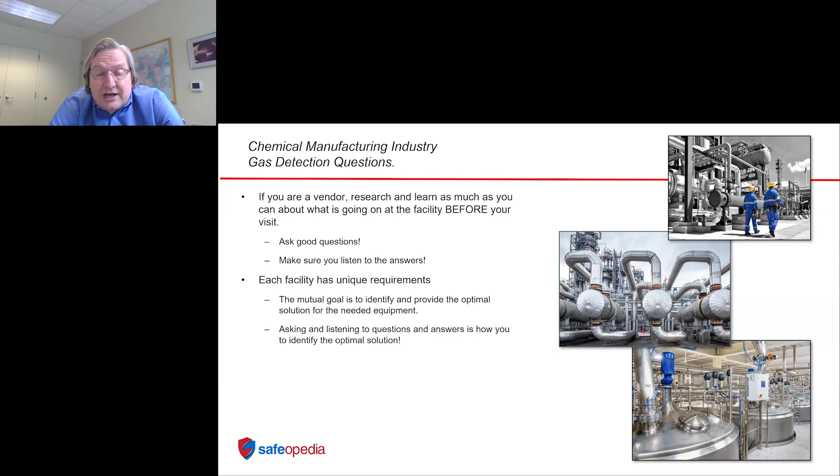So the good conversations involve sharing and asking questions and listening to the answers on both sides of the discussion. You can't have a one-sided conversation. So as an end user customer, it's also important that you look inwards a little bit. You need to have a detailed grasp of the gas detection activities and risks that are going on and exist at your site with your business.

The better the understanding that you have, the better the solution you're going to come away with if you make changes or buy new equipment in the future. And sometimes, I know this for myself, if you find yourself in a corner office, it can be an isolating experience. It sets up barriers between you and the people who actually work for a living.

So leave your office, talk to your employees, whether you're a mid-level manager or an upper management executive. Make sure that your communication and your questions flow up and down the chain of command. The more detailed grasp you have, the better. Drill down to make sure that you understand what is most important, not only to you, but to the people who are using gas detection equipment on site.

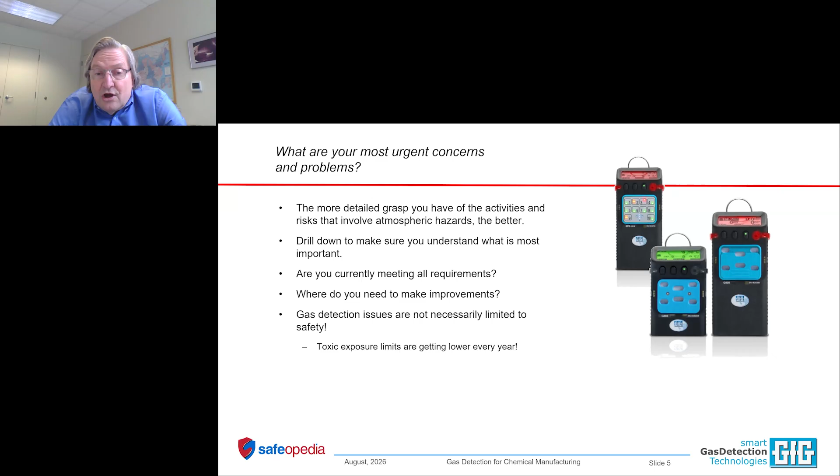You have personal exposure, industrial hygiene, emergency response. The list goes on, and we'll talk about a lot of those categories in the next few slides. Here's a starting list. A lot of times, vendors will focus almost completely on confined space, and boy, oh boy, do you find a lot of confined spaces and confined space entry programs at a chemical plant or in the chemical industry. It's definitely a major and important way that instruments are used, but that's not the only category of use.

Personal exposure monitoring: you may need to document that your workers on site are not being subjected to even momentary exceedances of permissible exposure limits for, say, H2S. Every person on site might be required to have an H2S meter for personal monitoring and exposure documentation. You might have a program that requires you to download the logged information on a regular basis, to use that information to prepare a report that goes off to OSHA or your state Safety and Health Administration office.

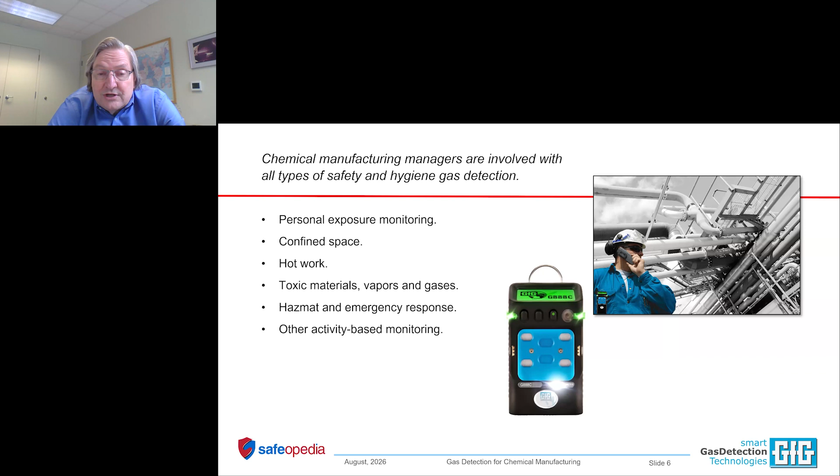In the chemical industry, almost by definition, you're dealing with or manufacturing or using or producing toxic materials, gases, and vapors. So a lot of times in the chemical industry, you're focused on a specific chemical that you need to measure or monitor or control. You have hazmat and emergency response. You have all sorts of other activity-based monitoring. In other words, there are a bunch of different gas detection objectives and requirements at a chemical manufacturing plant.

The manufacturing gas detection requirements can include production monitoring, process monitoring, facilities monitoring. Nobody wants to lose a $150 million complex or a $1 billion chemical plant in some cases. Sometimes it's industrial hygiene, sometimes it's community, such as a fence line or nuisance odor monitoring system. Sometimes the requirements are driven by EPA requirements, disaster response, and of course, construction.

At a good sized facility, there's always at least a little bit of construction going on. And during major renovations or updates or shutdowns, there can be a lot of construction going on, which leads to additional unique hazards and considerations, such as confined space entries that go on for a couple of weeks instead of a couple of hours.

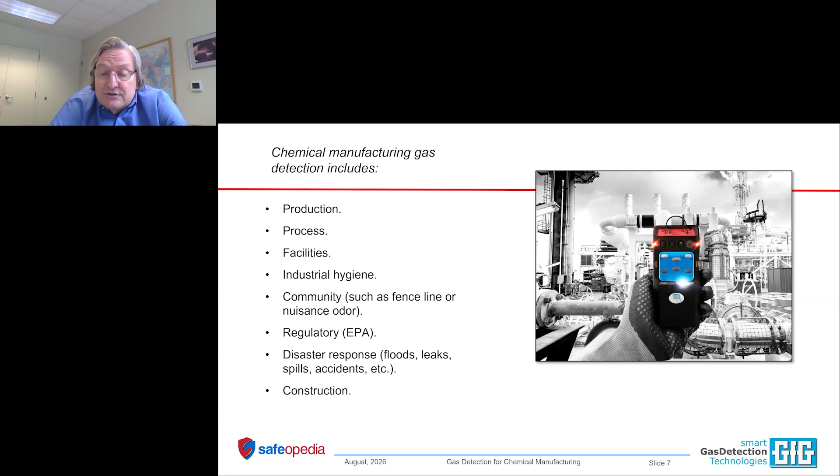Organizationally, it makes quite a bit of difference. And communication gets much more important. It's always important, but boy, when you have different contractors present doing different jobs at different points in the construction process, that introduces some pretty significant challenges.

So a lot of different missions, a lot of different activities, many of which are dependent on the use of gas detection equipment. For confined space, you have routine entries, large scale ongoing entries, entries into inerted vessels. What is an inerted vessel? Well, to reduce the chances for an explosion occurring, you might want to flood a confined space with nitrogen. So you replace any oxygen that was in the confined space atmosphere with nitrogen and reduce the chances for an explosion occurring because there's no oxygen, one of the necessary components for combustion or a combustion explosion to occur.

Hot work, other specialist procedures like catalyst rebuilding. Catalyst rebuilding is often done under a purge of nitrogen. And if you're a worker who is inside a catalyst tower, rebuilding and repacking the catalyst under a nitrogen purge, that's an intimidating situation, but it's done every day by experts. Not only do you have an issue with the respiratory protection that's required, which is pressure demand airline respirator with an escape cylinder.

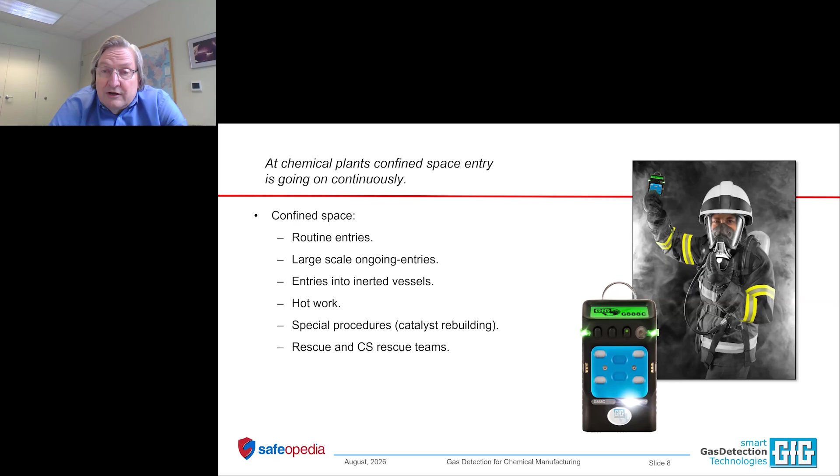And if you're a rescue or confined space response team, holy smoke, you could get drug into any of these types of confined spaces during rescue activities, and you better not do it in a dangerous way. 2 out of 3 of the people who are killed in confined space accidents are would-be rescuers. So you're twice as likely to be killed in an event in a confined space as a rescuer as you are if you were the original worker getting into trouble.

What are the most common chemical hazards, gas hazards that you run into at a chemical manufacturing plant? Well, first and foremost, it's so darn easy to get an oxygen deficiency. You can get it by displacement with a heavier than air gas or vapor. You can have rusting, you can have combustion, you can have reaction. Sometimes it's materials that cure in air, such as sealants and paints, where they actually take oxygen out of the air as they are curing and drying. There's just a bunch of different ways that you can come up with an oxygen deficiency.

And you also have microbial action. Microbial action, if there's some organic material around, is an excellent way of dropping the oxygen concentration. For instance, if you have crude oil, one of the first things that you'll notice if you're monitoring the oxygen concentration is that oxygen using bacteria and microbes do their job more rapidly than the other kinds of microbes. As soon as the oxygen concentration is really low, then you see other types of anaerobic bacteria and microbes beginning to do their thing.

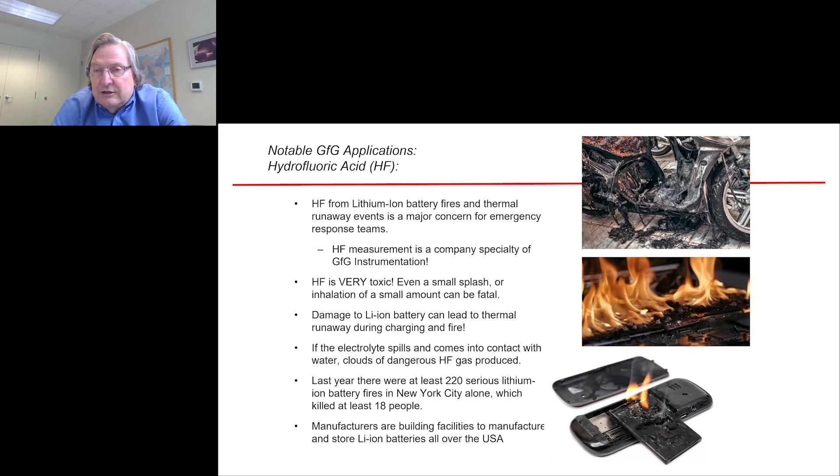So if you deal with lithium-ion batteries, make sure that your monitoring program includes instruments with the sensors that you need to use to keep safe. You also often have the presence of hydrogen, you have the presence of sulfides.

Lithium ion batteries are something that we use every day and that most of you have in your pocket right now in the form of a cell phone, and that I'm looking at in the form of my laptop sitting on my desk at the moment. Lithium ion batteries are everywhere, but there is a reason why there are prohibitions about checking a cell phone in your luggage when you fly somewhere.

As everyone who's listened to the flight attendants knows, you're not even supposed to put lithium ion rechargeable battery equipment in the overhead bin. You're supposed to leave it right at your feet where you can get at it if it starts to misbehave. So take HF seriously.

Gas detection requirements are definitely not only limited to the use of portable instruments. Sometimes it's a better approach to have fixed monitoring systems where the sensors are in a housing, the housing is mounted on the wall, and the operation is 24 hours a day.

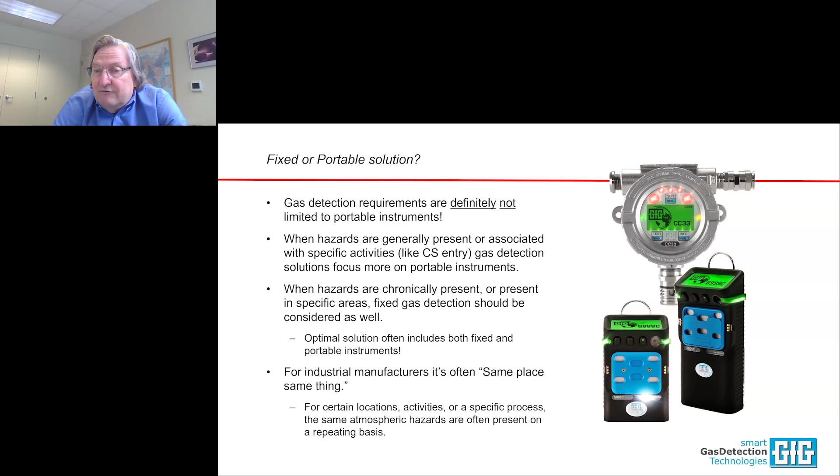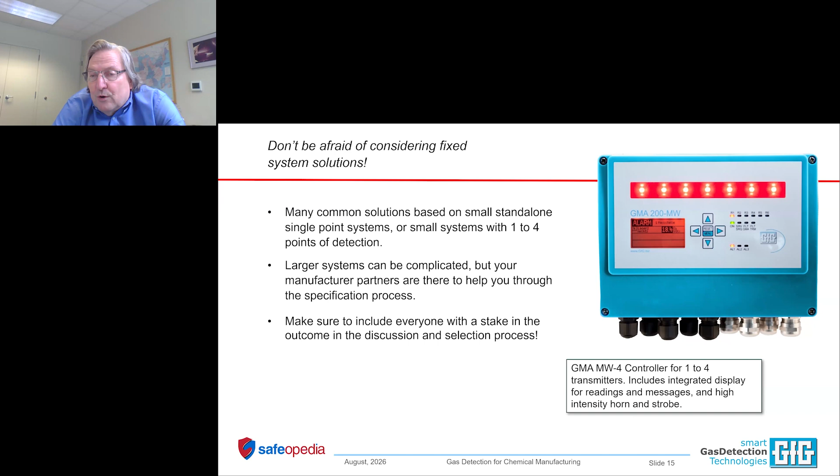And it's not a zero-sum game. Just because you have a bunch of or reliance on portables does not mean that you don't also need a fixed detection system. It's belt and suspenders, the two kinds of instruments and instrumentation systems go together. Don't be afraid of considering fixed system solutions. Many fixed systems are small, standalone, one or two or three or four sensor systems, which are very easy to specify, easy to install, easy to work with and calibrate. They're not dangerously complicated.

Figuring out what you need can be intimidating. Try to get your partners involved in the process. Specialist salespeople that work for your distributors are one good source of expertise. Manufacturers are an even better source. If you can beat your way through the telephone system to get to a knowledgeable person, they can really cut through a lot of the difficulties in coming up with a good system.

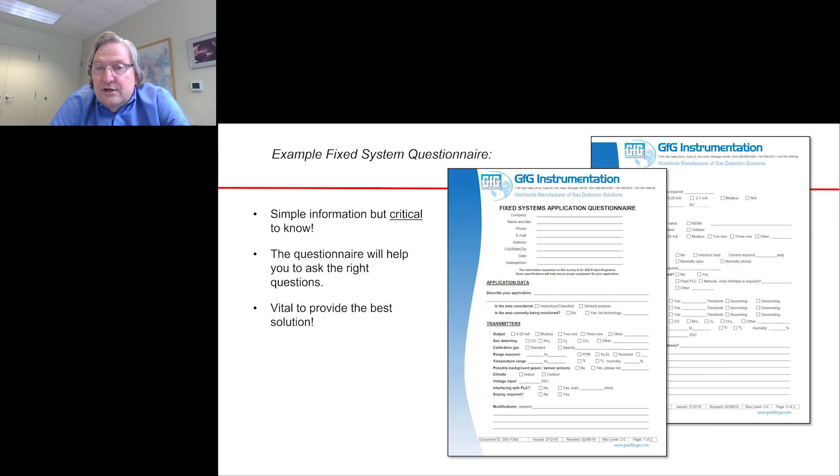And of course, all of the manufacturers, just like GfG, have tools like this simple questionnaire. You start out by filling out the questionnaire as best you can. The more information that the manufacturer has, the better job we can do when it comes to providing you with a quote. The reason we need some information is we have so many options. A fixed system, almost by definition, is going to be a customized system that is designed and configured exactly for you, not for another customer just down the street.

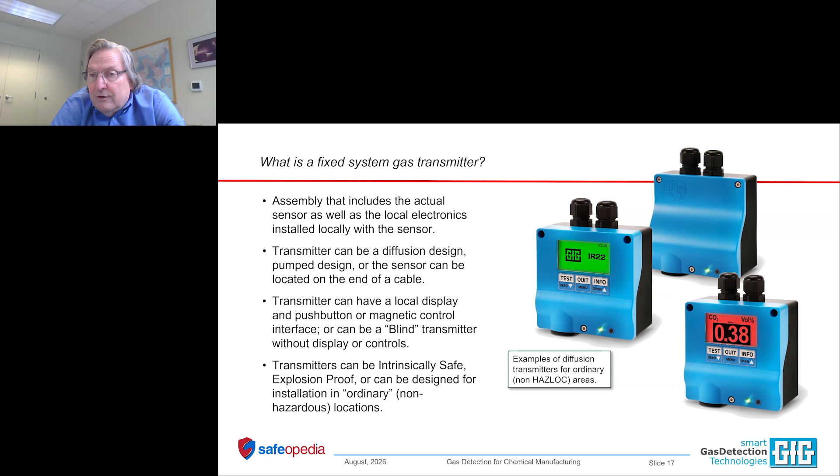The first step is to figure out what needs to be measured. The sensor is housed in what we call the gas transmitter. That's the sensor plus the localized electronics that provides power to the sensor and interprets the signal. You can have a display, you can have what we call a blind transmitter, you can have local alarms, sirens, horns, and lights. You can have anything you want on a local basis, or you can wire or transmit the information back to a controller or a computer or a programmable logic controller, a PLC. You can organize the system any way that makes sense.

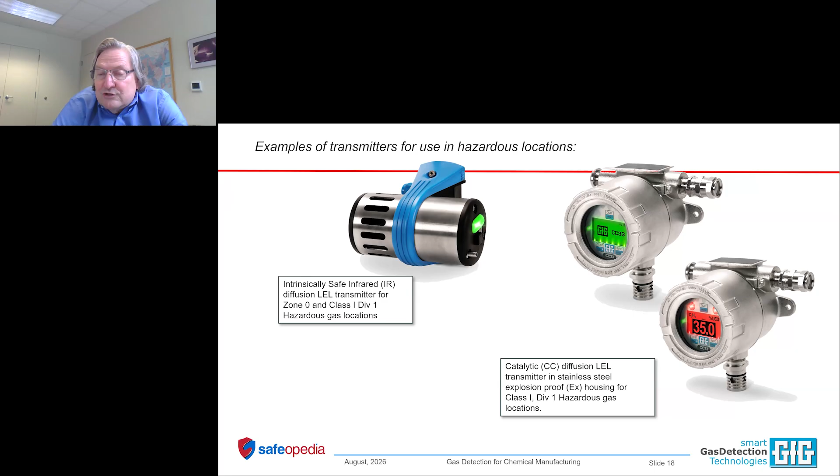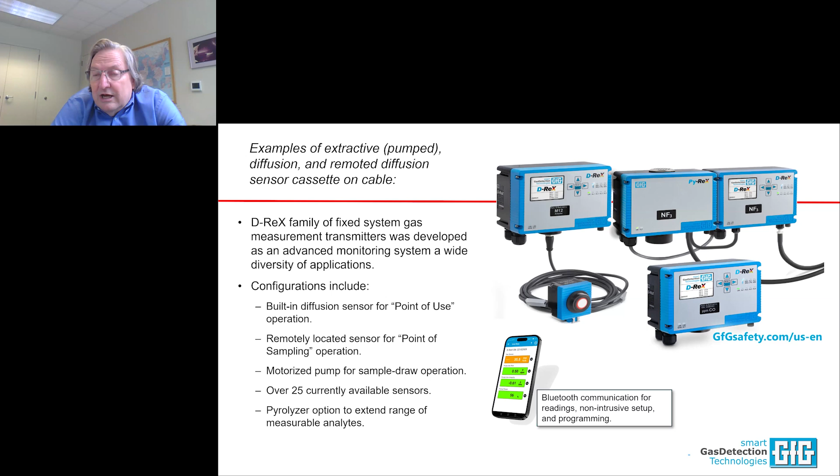In areas which are characterized by the presence of potentially combustible atmosphere, you're going to need to install those sensors in explosion-proof housings or intrinsically safe housings so that they can actually be in the area. Sometimes you want the sensor on a cable, sometimes you want the equipment to include a motorized pump that sucks the sample from a remote location back to the housing where the sensor is located. Sometimes you just want the sensor installed in the detector housing, operating in diffusion mode. But these are all options that need to be explored. The easiest way to explore them is with that questionnaire. Once you've filled out the questionnaire, it's a lot easier for the manufacturer to offer the best solution.

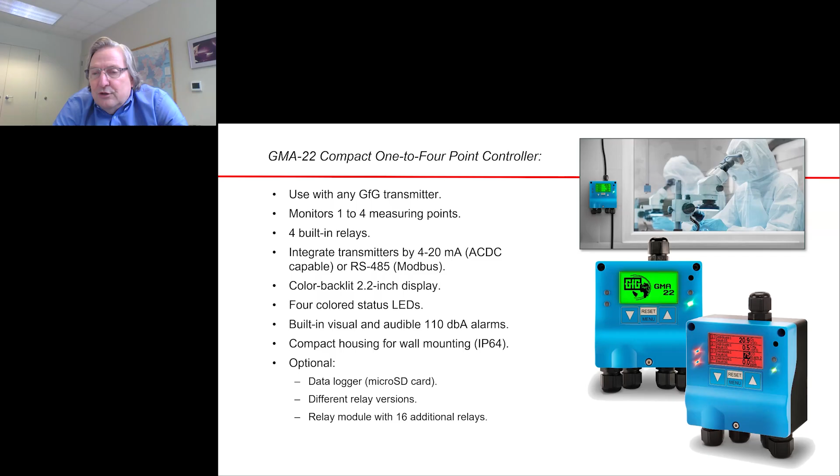What you don't want to do is buy it one way, realize that nope, if you remember the old commercial, if you're old enough, there was a great commercial for V8 vegetable juice, and people would think about V8 later, and the tagline was, "Oops, I could have had a V8." So you don't want to have that V8 moment after you've invested $10,000 into a system that should have been brought in with a slightly different configuration.

You also have many options when it comes to how you integrate the system. You can integrate the system the old-fashioned way with 4 to 20 milliamp wiring. You can use wireless transmission. You can use Modbus digital connection. There's a lot of ways that you can go. But the idea, especially with your fixed detection system, is whatever information you need, you make sure you have it at the right place at the right time.

And of course, with GfG, our product is blue, not deadly blue, excellent blue that protects workers, but blue is blue. And I'm sure that Tuco would have found something wrong with our color scheme also.

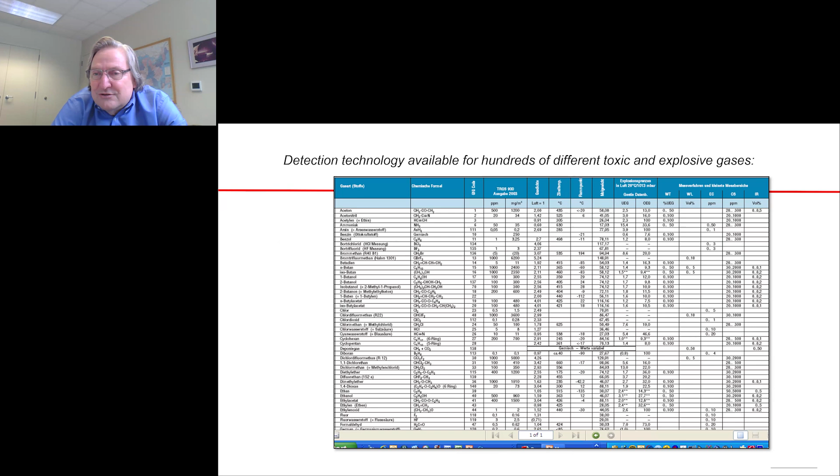But given our color scheme, given our sensors, given our technology, we have a lengthy list of over 500 gases and vapors that we can detect. And again, a lot of the reason that we have such a wide range of gas detection products is we control the sensor technology that we use. And we're very proud of the quality of our sensors.

For instance, what about the LEL sensor? I already mentioned that some kinds of LEL sensors are good for hydrogen. Sometimes the sensor is not able to detect hydrogen. So when we are talking about fixed, when we are talking about portables, we always discuss the hazards, and we will fit the configuration that we suggest to the hazards that you actually are dealing with.

Traditional catalytic sensors detect the gas by, in effect, burning the gas. They catalytically oxidize the gas, which causes an increase in temperature within the sensor, which is proportional to the concentration. That kind of sensor is very common. We use it all the time, preferentially. It's a great sensor. It has some limitations.

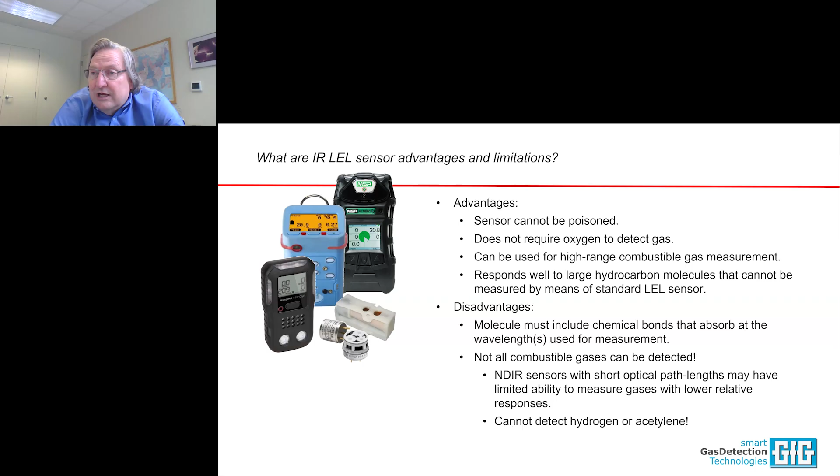For instance, a primary advantage of the IR LEL sensor is you don't need oxygen in order to have the operation of a sensor. With the catalytic LEL sensors, you can't really use it in an inerted vessel because it requires the presence of at least 10% oxygen in the atmosphere for the sensor to work.

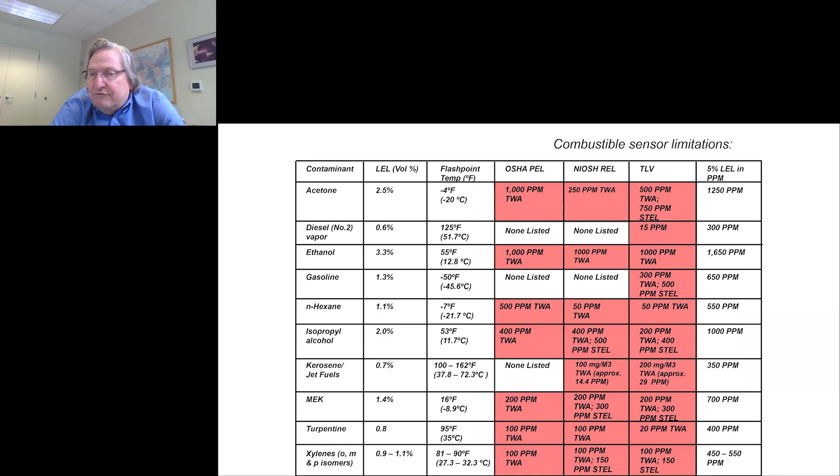PID is another company specialty. PID is the kind of sensor that you use for volatile organic chemical vapors, VOC vapors. VOC vapors are pervasive in the chemical industry, and although VOC vapors are explosive, they are toxic at much lower concentrations. Every single VOC in the NIOSH guidebook hits the toxic threshold long before you even get to 5% LEL. So if you're trying to get by using a combustible meter for VOCs, it's a terrible idea.

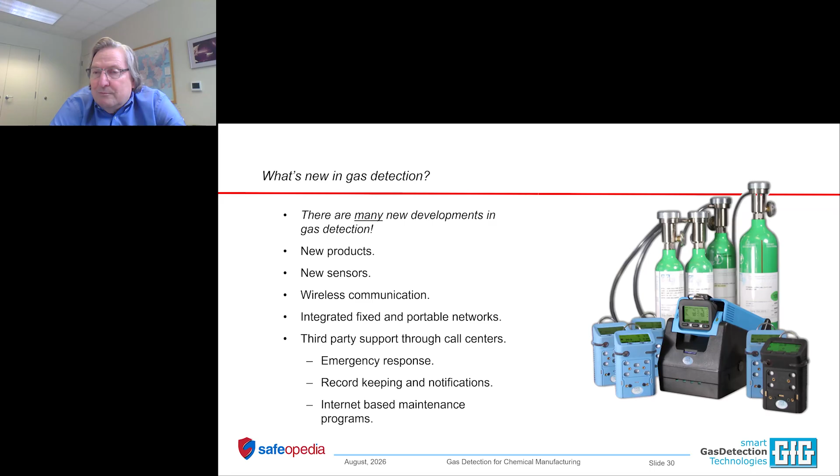There are lots of new things going on in gas detection. It's a very active, innovative industry at the moment. And it's hard to keep track of all the new stuff that is available. That's the role of your suppliers, distributors, specialists, salespeople, especially ones from our AD affiliated distributor family, who are very knowledgeable. They sell a lot of gas detection equipment. And even if they don't personally have the answer, they know where to go to get you the answer that you need.

Once again, start by looking into your own operations. Figure out what you are using now throughout the organization. Find out from the people who use it within your organization, how is it working? What are the current capabilities that you have? Or what do you need to improve? What do the guys who are using the equipment say they need and would like you to think about in the future? Excuse me.

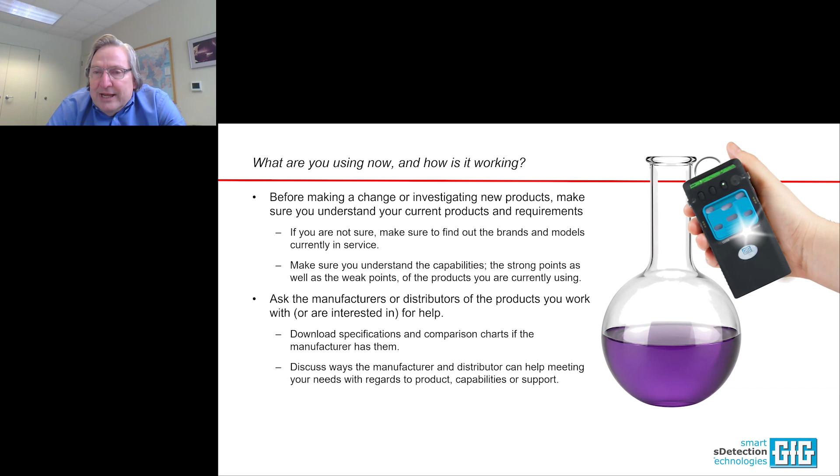I will let you, speaking of gap analysis, I will let you guys gap that out later.

So, what are you using now and how is it working? Important questions to ask. Are you generally happy? Meaning, are your employees generally happy? Are you having problems? How old is the current equipment? What features have you heard about that you are interested in? What are the brands and models that you are considering or that you have heard about?

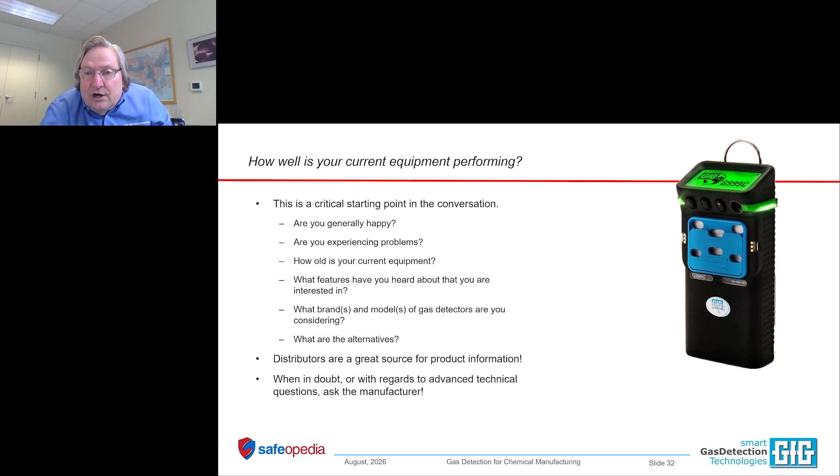What are the alternatives? Again, distributors are a valuable source and conduit of information. Even if you think you know what everyone has to say, ask. Trust but verify. This is the critical starting point in the conversation.

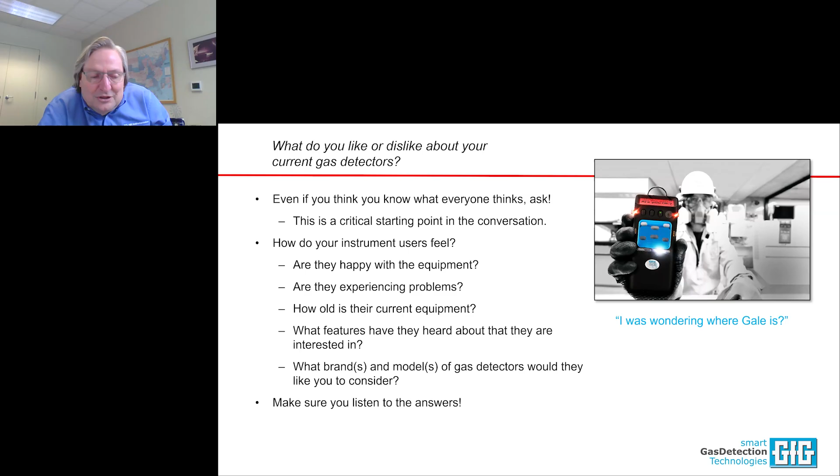You really want to find out the problems that are going on before you bring in something different. And this, again, another of my favorite Breaking Bad moments. I was just wondering where Gale is. Gale is the brilliant chemist who also did not make it through the end of the series. Jesse took care of him to save Walter.

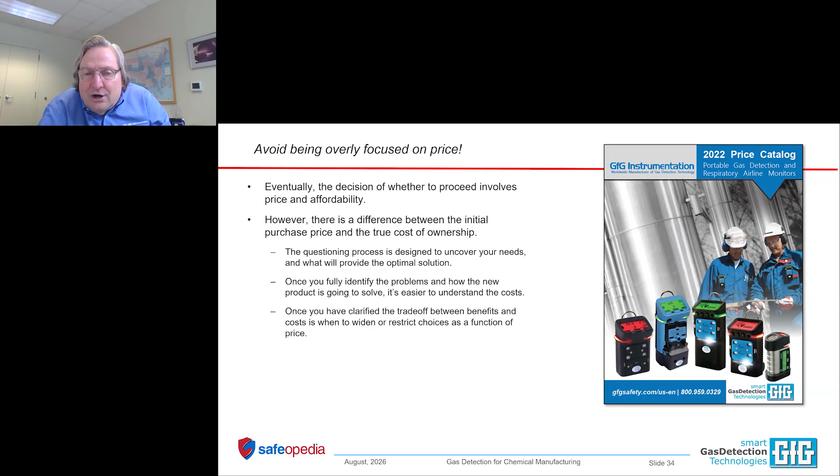Avoid being overly focused on price. The decision eventually comes down to price, but it's better if you figure out what you need, what the trade-offs in cost and performance are, before you get completely focused only on price. And remember Walter's words of wisdom. Don't settle for some tepid off-brand generic cola.

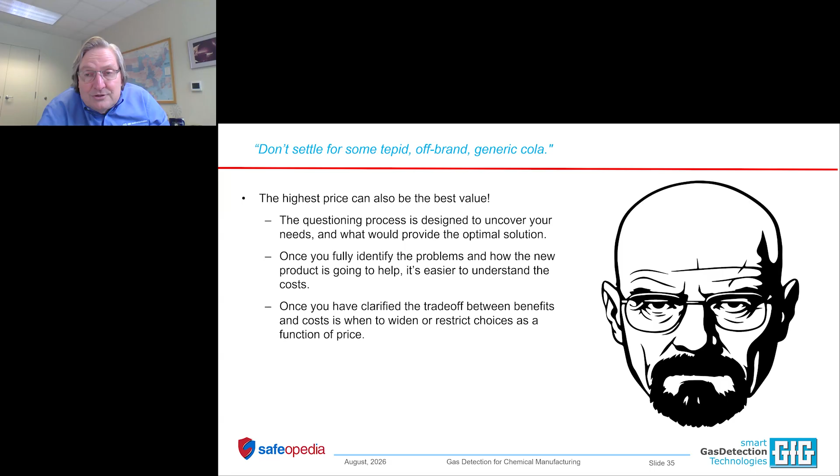There's a difference between the initial purchase price and the highest value proposition or cost of ownership over the life of the instrument. So sometimes the most cost effective solution might have the higher initial purchase price. Bring that into the investigation by identifying your cost of ownership issues.

Are you being charged a monthly fee? Can you trust your current gas detectors? Do you have a lot of sensor or battery failures? How often do you test and calibrate your instruments? And how tough is that? Do you do it yourself or use a service? Do you feel like you're getting a good deal?

Make sure you think about how you're looking after your instruments, and you don't want an unqualified individual that is maintaining the equipment in a shoddy manner and putting you at risk. Once again, that's one of the reasons I'm so proud of being part of the AD network.

If you are using a vendor, an AD distributor who has a qualified factory authorized service department, you know that the guy who is working on your instruments is not Badger, who, as you might recall, is the designated idiot in Breaking Bad. I have always loved that "say my name" moment with Walter.

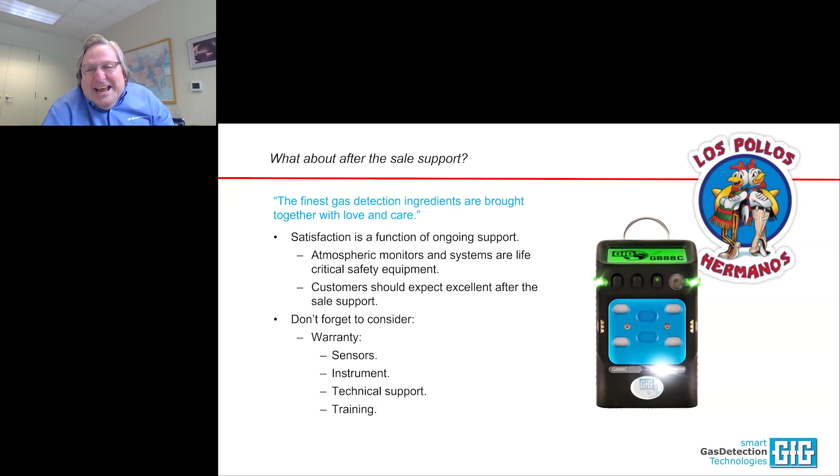And finally, who doesn't love Los Pollos Hermanos chicken? In our case, I would say we have the finest gas detection ingredients, which are brought together with love and care. And actually, that's kind of funny, but we're serious about that. The quality of the gas detection product is certainly even more important than the quality of Los Pollos Hermanos fried chicken. And we have a lot of information on our website that can help you decide why our instruments are the world's most tasty and have the best ingredients.